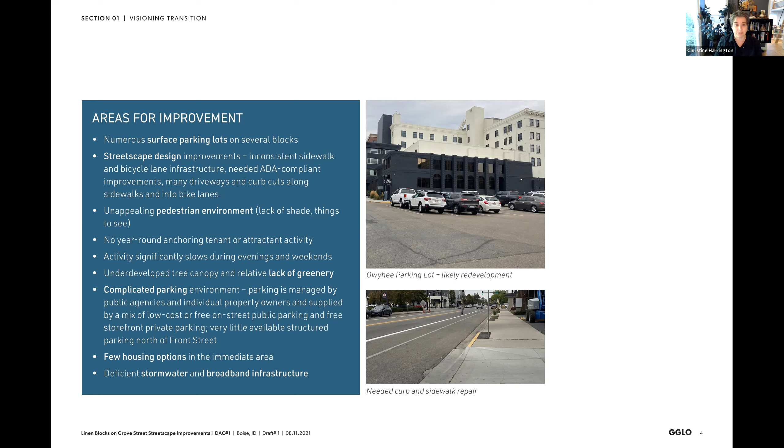As we move forward, we also looked at these themes that were brought up during the visioning, and started to think about how we can translate these themes into the materials and design moving forward. A couple of themes that really struck us were light industry, the housing, transportation corridor, and immigrant working class, all kind of merging together.

With light industry, we started thinking about materials - potentially using metal, brick, dimensional stone, concrete within portions of the neighborhood. Looking at pedestrian scale and gathering, how do we bring this community aspect that was very prominent during the early 20th century through flexible open spaces, welcoming pedestrian realm, impromptu gatherings and daily meetups.

And looking at the history of the transportation corridor, we were excited to think about how we could leverage some of the large-scale signs and landmarks already there and create these roadside attractions that would be sticky elements as people were driving along Front Street and Main Street in Idaho, and you look down 11th or 16th and catch an eye that draws people into the neighborhood.

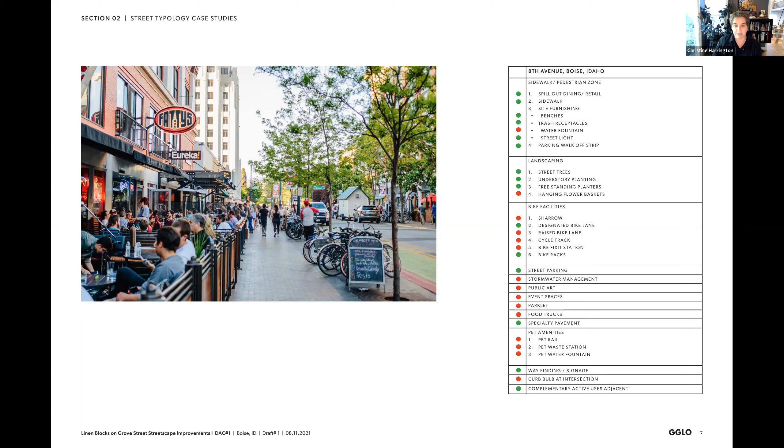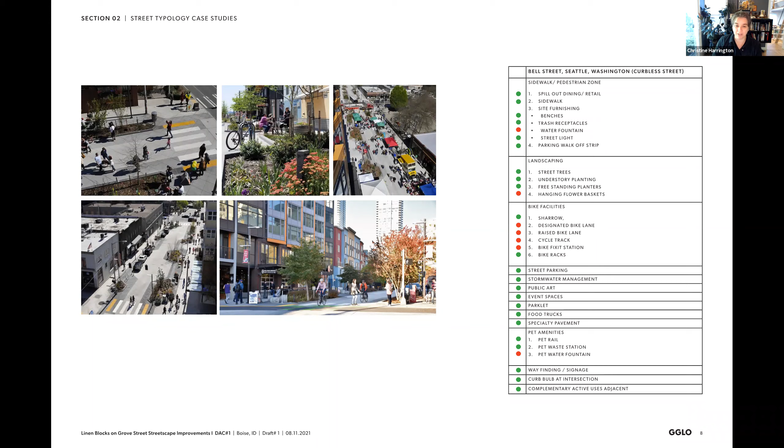As we look at a few other streets as case studies, we have a street in Seattle called Bell Street, which has really become a festival street. They have eliminated all curbs, so it's really a type called a festival or Woonerf street, where people and vehicles kind of merge together. It allows breakout events very easily, as well as daily life with bicycles. It's just a very easy, walkable street. Now, there are some things in this that work well for our street, maybe not the curbless elements all over the place, but there could be some elements that would really help.

Another one in Seattle that we took a look at was 7th Avenue. This is running by the Amazon spheres now, and it's a really bustling hub in the Belltown and downtown area. This raised, separated cycle track really allows people to commute back and forth from North Seattle down into downtown. It also encourages people to pull off and park their bike at these destination retail spaces along the side. It's a very safe and welcoming area for both bikes and pedestrians, and it gives vehicles an understanding of where they can drive and where it is safe for bikes to be.

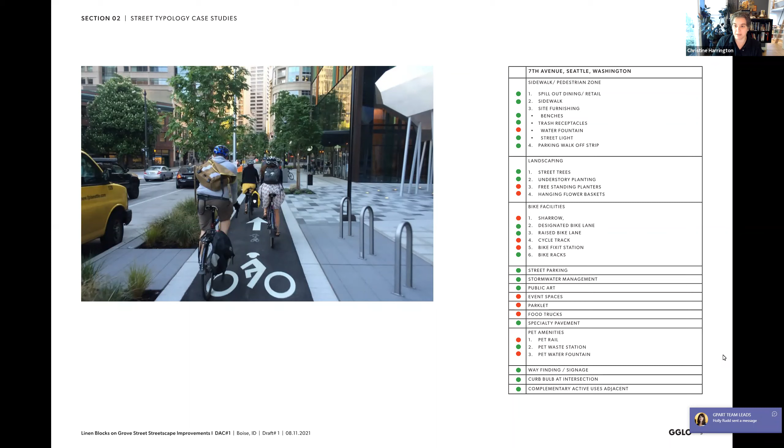Then we also looked at Alberta Street in Portland. This is a really vibrant festival street with a lot of color and historic buildings. They've activated the street with spill-out retail as well as a lot of public art, so people come down here for these Instagrammable moments with murals on the building facades. You can also see here a lot of different layers of planting in pots spilling out of the retail, as well as the street trees and street planting.

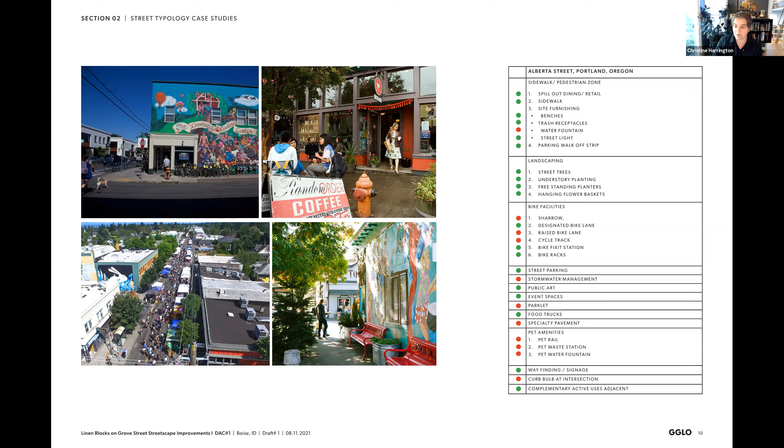We looked at another historic district down in the Pearl District of Portland. This is interesting because they have a much smaller right-of-way space here, much smaller than what we have on Grove Street. So to differentiate the right-of-way and the public realm, the sidewalk and pedestrian realm, they started doing some elevated sidewalk areas to really separate and give pedestrians a sense of safety and security.

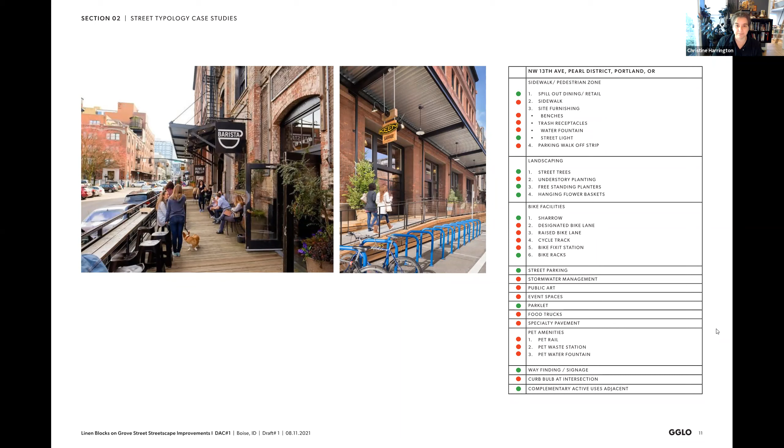Then we looked at 24th Street in San Francisco. This is very similar to Grove Street. It's a local business district with restaurants, retail establishments, residential, and a very lively street. As many of you probably know of San Francisco, their streetscapes are pretty barren, usually just trees in tree grates. But here on 24th Street, they really started to amp up the planting, which was a commitment by the retail and property owners adjacent to it.

So you can see here one of the things they incorporated are these pet rails to keep pets from going into and using the planting, so it really retains the lushness of the planting material. It really gives a sense of these different spaces and outdoor rooms. This is a heavily trafficked street, but you can really sense the scale and the ability to have nice walking and dining experiences, even though it's a really busy street.

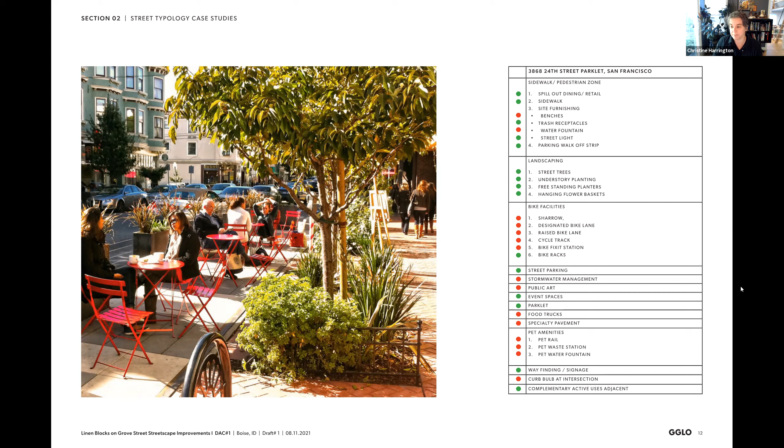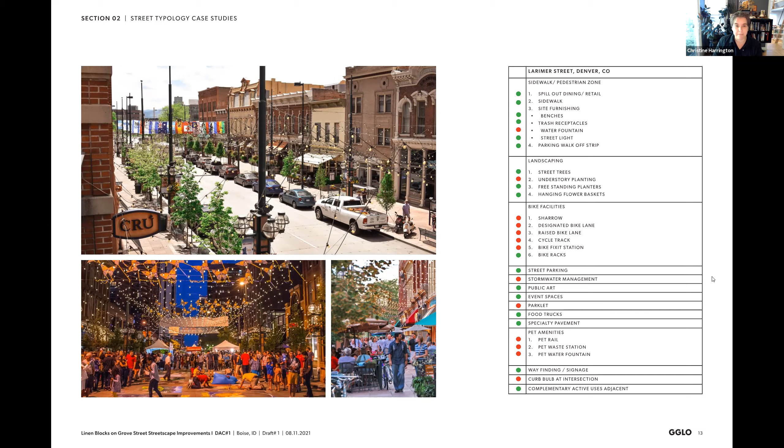So when we looked at all of these together, we start to see the common themes. Retail spill-out dining was a common element. Sidewalk furnishings were common elements. And you can really see what was making these streets livable and truly destination spaces.

So we will be filling out our matrix here for West Grove Street as we continue through design, making sure we are checking off as many of these as possible to ensure we have a nice, livable, and welcoming streetscape for pedestrians, bikes, and vehicles.

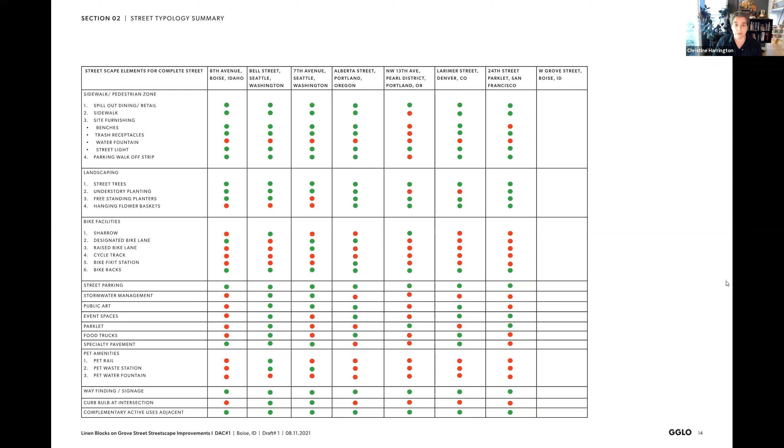It ties in with all of these cross connectors, especially the new bike lane on 11th that they're going to be building in the next year that runs from the Boise River Greenbelt all the way up to the foothills. So we are also really blessed with having all these surrounding parks.

Like Mark said, we just finished and opened the dedication to Cherie Buckner Webb Park. So we have these two parks on either side that really we can draw people from those elements. And as we were talking to Tree Fort and other events that could happen in this area, it really gives us this central core that we could host events here on Grove Street.

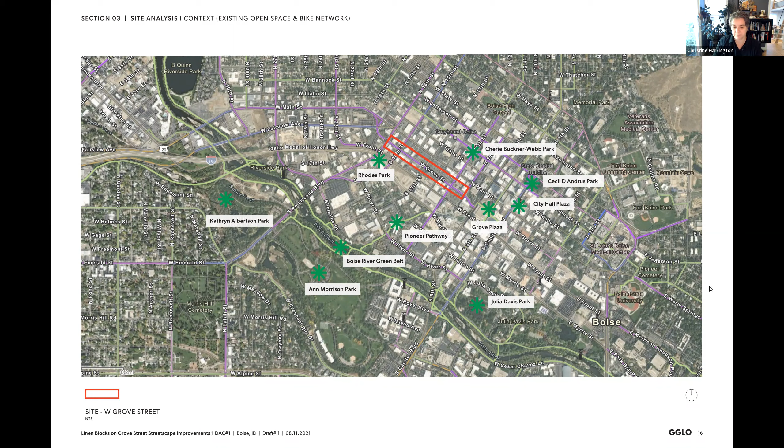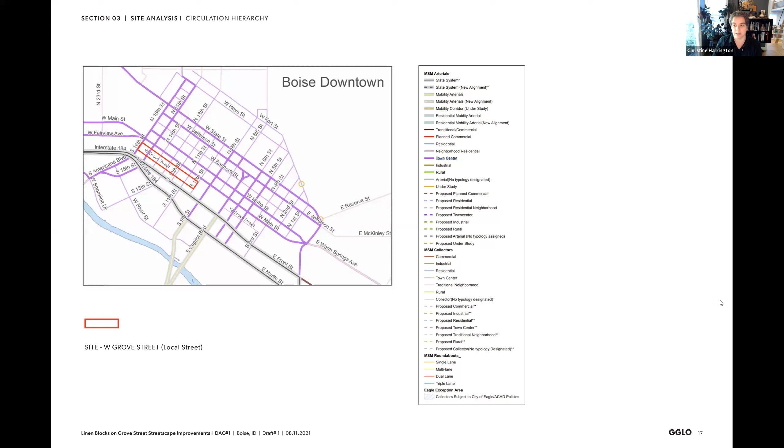So when we looked at the circulation and the street types within downtown, Grove Street is identified as a local street. All of these larger purple streets are main collector streets, and then these smaller purple streets are residential collector streets. So ours is really meant to be a local town center streetscape scale and feel. We'll go over that a little bit more later when we show you the ACHD's design guidelines for those.

So if we kind of dive a little bit more in there, as you guys are well aware, we have a lot of traffic on Main Street, a lot of traffic on Front Street. But if you look at kind of the scale of Main, Idaho, and Grove, they all have that same really wide, 80-foot wide streetscape, including the sidewalks.

So how do we differentiate the bustle of Front Street and the main thoroughfare of Main Street? How do we differentiate Grove Street from that? And how do we slow the traffic down as it was intended to be, to allow people to look over at the retail establishments and bring them over to get them to stop, park, and use the retail?

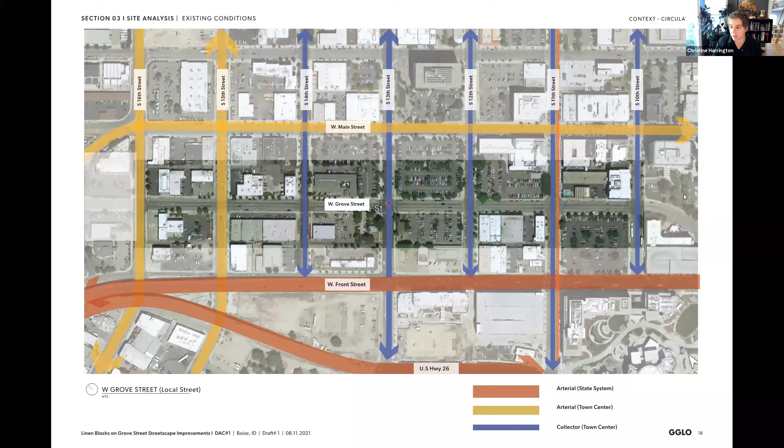Right now, parking is really a premium, and mostly it's because a lot of people park down here and then go and work downtown. So we want to make sure that those parking spots are actually used for the retail establishments as well, and really to allow people to stop and visit our Linen District.

So if we zoom in a little bit more and start to look at what the use of all the properties adjacent to Grove Street are, you can see a lot of parking lots. As this was the auto row back in the 50s, 60s, 70s, these parking lots really served a purpose. They're not quite serving the same purpose now, or what we would like to see for the Linen District.

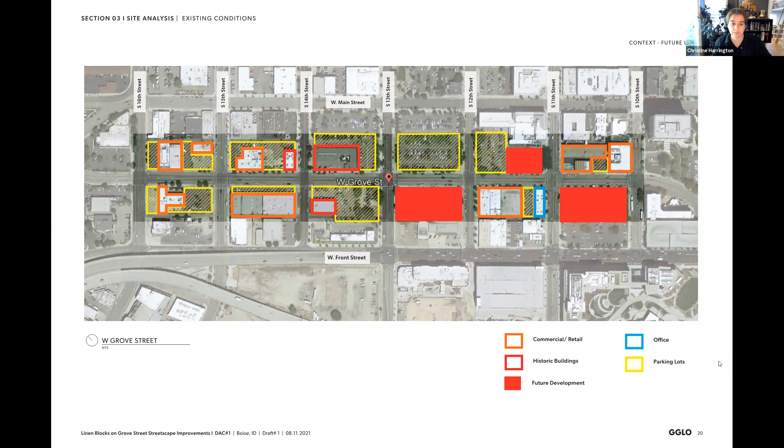So as we dive in, we're going to be looking block to block as to what we identified when we were on the street. And then also we'll look at a cross section of what that looks like, and the opportunities that we see just at first glance. We'll start looking more deeply as we start to do design, but just wanted to give you guys this first glimpse of our findings.

So you can see that there's a lot going on along the street. One of the things that was kind of historic of the street are all of these curb cuts. That made a lot of sense when this was auto row, to get in and out of the parking lots. People really used Grove Street as a main thoroughfare.

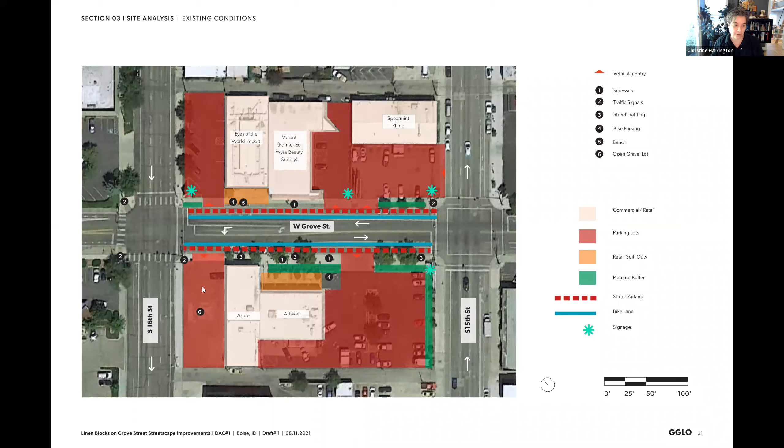And actually, you'll see there are a lot of these - if that kind of corner was a gateway, how do we start to enhance that? Because right now we just have these two parking lots at the corner.

So if we look at just the scale of this, it's pretty much an 80-foot wide right-of-way, which encompasses typically 11 to 12-foot wide travel lanes. This one happens to also have a turning lane onto 16th. A 5-foot bike lane, which is standard for ACHD's bike lane dimensions, an 8-foot parking lane, and then we have usually 10 to 12 feet of pedestrian realm, which can be planting or furnishing zones, sidewalks, spill-out retail.

Where we cut it right here in front of Eyes of the World, you can also see the opportunity for spill-out retail as the building is set back. So we'll be looking at throughout design, what are the elements that we can plug into each one of these zones. We'll be calling them a kit of parts. So we'll look at each one of these zones and how can we enhance each one to make it function better in the Linen District.

So as you can see here, the intersection of 16th is ripe with opportunity for some sort of gateway element. And also, if you are standing in the crosswalk looking down, the thing that struck us most was just the scale of Grove Street. 80 feet isn't actually that large, but because of the lack of layering of amenities, it just feels expansive and really overwhelming to the pedestrian.

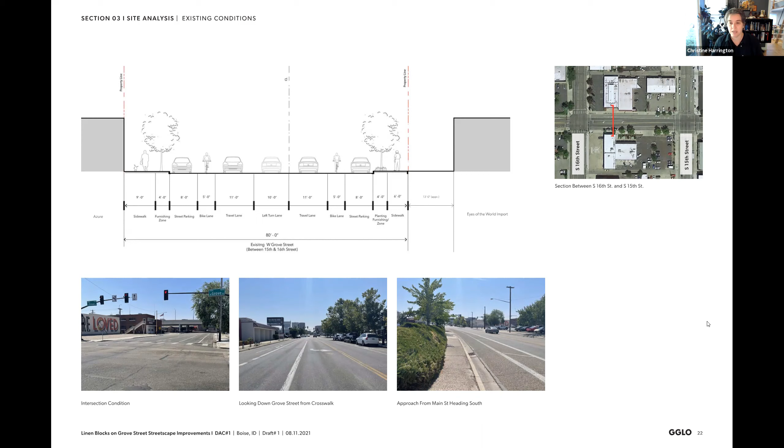So what we want to do is really designate and differentiate the pedestrian realm from the vehicular traffic realm. And then you can see it also as you approach that intersection from the north, you really can't tell you're entering the Linen District. So we really want to make sure that we highlight that with some sort of gateway feature.

Want to enhance these pedestrian crossings, making it safer and more visual for vehicles and safer for pedestrians. Other elements that we identified were street trees, potentially narrowing some of these driveway entrances. We spoke to the owner of Eyes of the World property, and we talked about how can we utilize the front access, maybe one-way directional access, so we can narrow that driveway and then exit out on the alley. We're really fortunate to have alleys on both sides of Grove Street that we could utilize.

And then another thing that is really unique to Grove Street are all these iconic signs and billboard signs that run along there, which again are remnants of this auto row and vehicle-centric area.

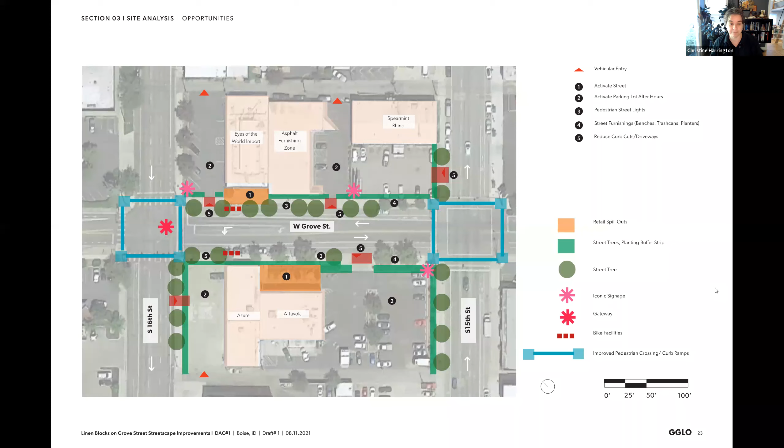So if we go to the next block, we shift down to 15th Street, we start to see kind of the same thing. We have a lot of parking that is butting up against the sidewalk. This block is actually unique in that we have a parking lot with a drive aisle, with a sidewalk, with parking, and then another drive aisle. So you can see a lot of this really valuable developable space is taken up by cars.

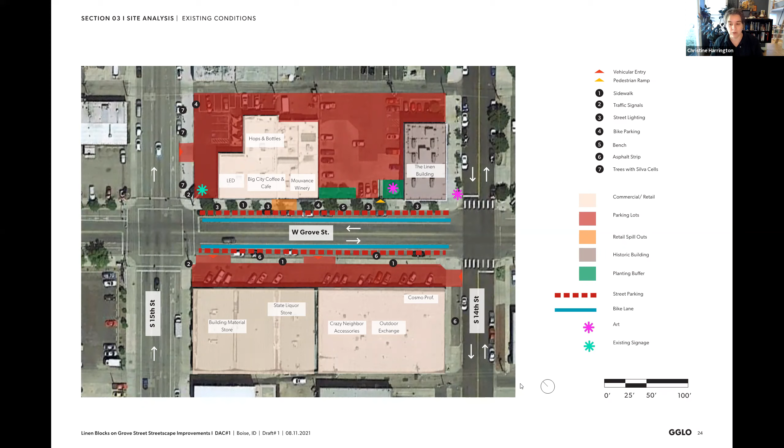And so we looked at how can we start to change that a little bit and start to break down this 30 feet of parking and travel aisle here - drive aisle, they're on private property. How can we start to look at that differently and incorporate some of that for open space and amenity space for those retail establishments to draw people in, and potentially shift that parking to better consolidate the drive aisles.

We also saw that there are these really beautiful little nooks and crannies along Grove Street, where in this case it's a piece of mural art with the Linen District. And some of these have been kind of fenced off and inaccessible. So we're seeing how we could potentially carve out some of those spaces and work with property owners to create those amenity spill-out spaces along Grove.

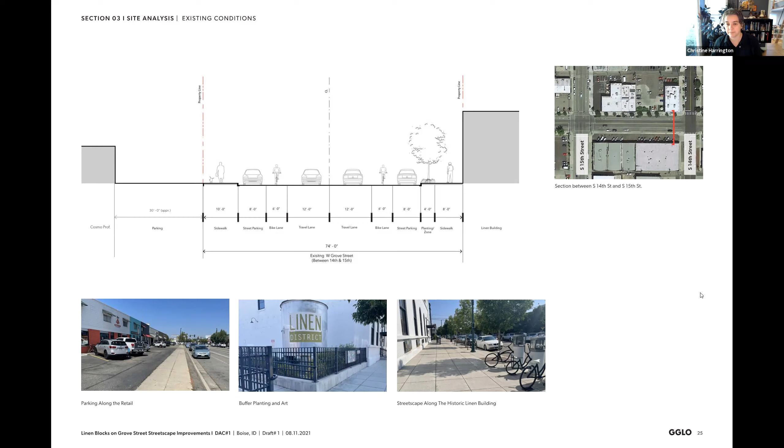So as we start to look at that, how do we bring in amenity outdoor spill out space, like they're doing at Big City Coffee along the western side of Grove. Potentially some ideas are having these spill out amenity spaces with a planting buffer, the sidewalk, and then shifting that diagonal parking or additional parking out onto the street, so it could be used by the travel lane already. We can take up some of that travel lane that is being used on the property.

Potentially, if the retail establishments and property owners agree, we will work with them to give them some design ideas for the future. Another thing is carrying on that tradition of these large signs that we see at the corner of 15th and Grove at the LED. So potentially having additional signage, either historic signs that were identified in the visioning package, and or new signage if retail establishments want to participate in that.

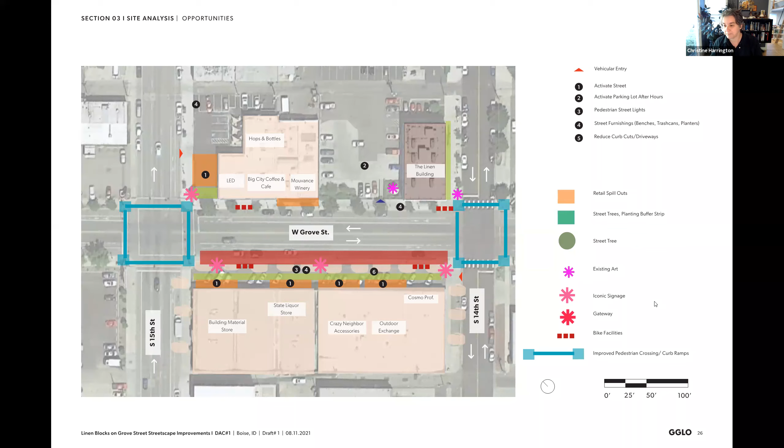So the next block we looked at is between 14th and 13th. This is at the Modern Hotel and Oakley Moody. Oakley Moody, the beloved and long-term retail and service business, is really a unique property because the parking is actually not just parking, it's kind of service oriented. So how do we celebrate that history of the automobile and the auto row? How do we celebrate vehicles and parking and the service industry in this one location? It will be really interesting.

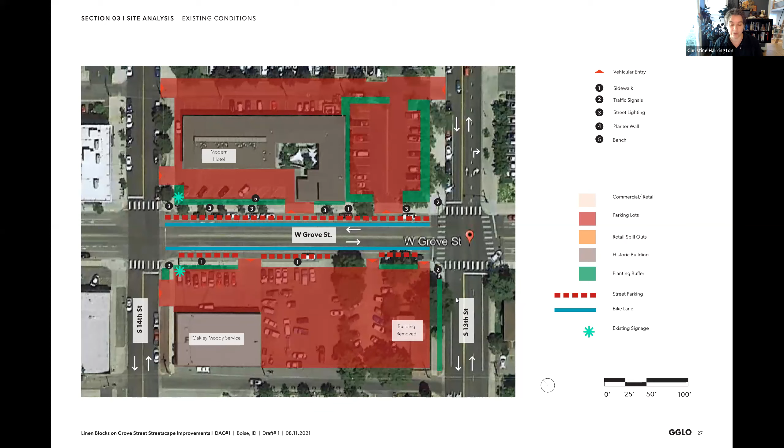And how do we start to work with the bike lane that runs through here, and how do we make it safe for bikers and cars to go in and out of these parking lots? As you see, we have one parking lot and two other parking lots that are kind of all joined together. So we were looking at, again, that's 48 feet of opportunity. We see it, especially down here at the corner of 13th and Grove, where that parking lot is used during the day and oftentimes not as much in the evening hours after people go home from downtown.

So trying to figure out how do we utilize some of these temporary parking elements for event spaces and activate them after hours to bring people from the neighborhood down to this area.

What's going well, actually, let me back up one. I guess I want to see if I can back up one. There we go.

What we found was really successful in this block is the planting and buffer planting that the Modern Hotel had that separated the sidewalk from their parking lot. You can see here in this image down on the lower right-hand side. It really gave this area a separation where the pedestrians are feeling comfortable because they have a lane of parking that buffers from the traffic, street trees that give them shade, and then this other planting buffer that is mitigating the parking on the other side. So you're starting to really feel like this is a pedestrian realm and a safe space.

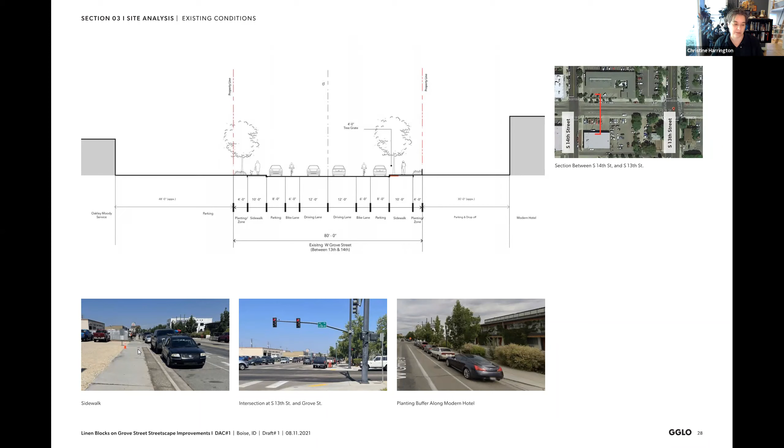The next block is between 13th and 12th Street. This is the block with Idaho Power. Their parking lot we know is going to remain for the foreseeable future. However, the parking lot to the west is slated for redevelopment, and so the current condition that you see here will change.

Some things that we really found interesting and unique about this block is that even though there is this large parking lot adjacent on the east side, they have a pretty deep planting bed that runs between the parking and the sidewalk. It really gave this passive, quiet feel to the sidewalk. It was really amazing just your perception as you walk through that with having just some plants on the street. It made it feel very quiet and safe for the pedestrian, even though there was really no retail establishment. It was almost like a little strip of linear park along this side. So we want to see what we can do in the design to really leverage that and create more of a linear park-like feel along that edge.

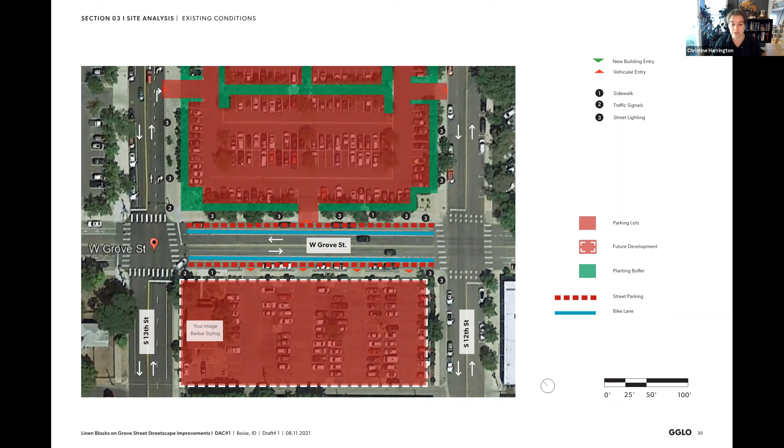You can see here, it was probably almost about 8 feet deep of planting, and a pretty wide sidewalk. They did have some trees on this side as well.

And you can even see it in this lower section—it really felt like you can almost see this kind of historic park-like feel with the mature trees and the layered planting and street lights.

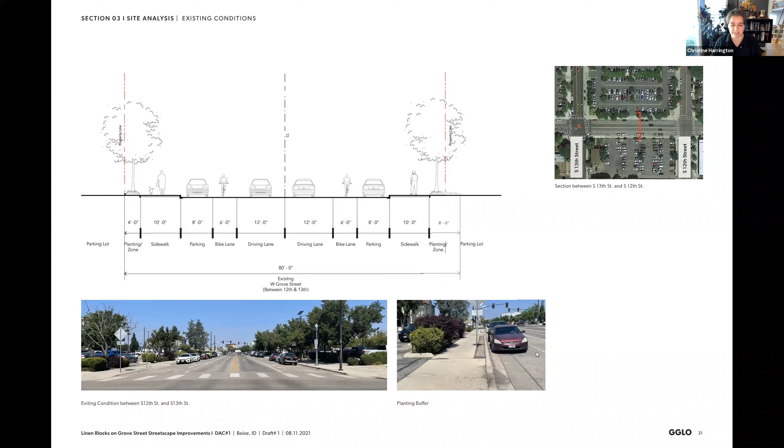Really good bones. So what we were looking at there is how can we activate the actual on-street parking right there. It's not serving any businesses across the street, so are there ways to leverage that on-street parking with potentially parklets or food trucks or elements that would really enhance this area.

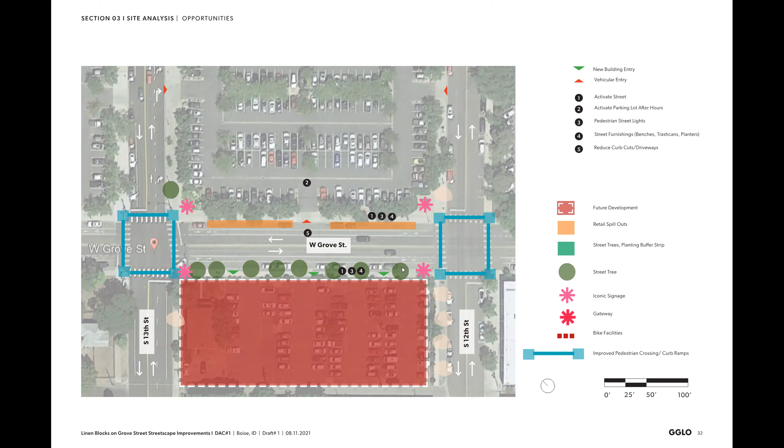And as we look at the new development coming in the future on the south side, we've gotten a couple of glimpses at their floor plans, and what we've gleaned from those are probably retail establishments on the corner with a leasing or lobby in the center.

So it's really going to transform this section of Grove with removing all of the curb cuts on that side, making it a very walkable section and much quieter in feel. And of course, we are always going to be introducing improved sidewalks and intersection crossings.

We also identify this as potentially some areas, since we do have the ability with the new development and also the setback of the parking, to potentially have iconic signage added here, either historic signs or new signage or artwork to continue that vocabulary down the street.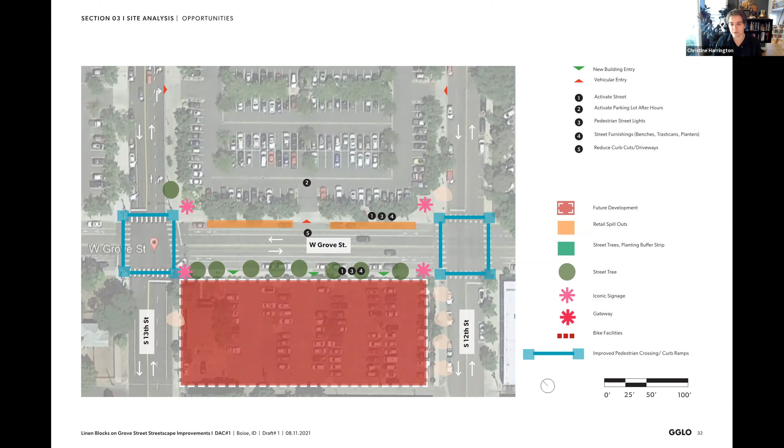So the next block between 12th and 11th, we have a really nice scaled pedestrian walking block on the west side with now the new Presbyterian church space pretty much taking up this whole frontage of Grove on the corner, High Tech Color and Salon 117.

So all these are really kind of community-based and service-based businesses that we would like to develop a streetscape that encourages spill out and activation of the street along that edge.

We also see an opportunity with this small little parking lot and the blank facades along these buildings as potential areas for public art, as seen down in Freak Alley or elsewhere where artists have been able to do murals on the side of buildings.

On the east side is the parking lot for the Owyhee Tavern and Hotel. Coming soon is a little boutique hotel on the corner. So this will really transform this space.

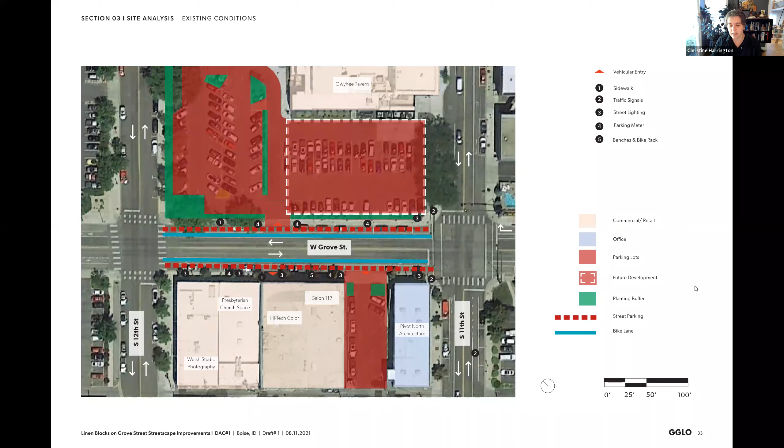And as we look at what that could mean, continuing that planting that buffers parking from the streetscape, and also taking advantage of the opportunities with these blank facades of the buildings.

This section is also in the Downtown Business Association section. Is that correct, Amy? This block? Yes, the bid ends at 13th.

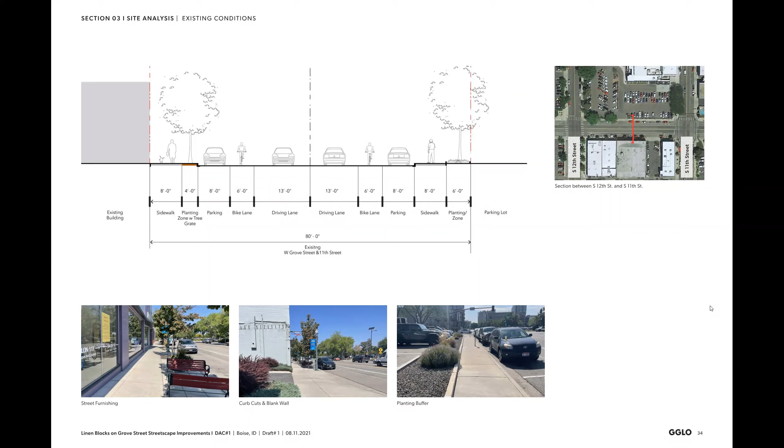So you can start to see where the site furnishing has really helped, and also the care that the businesses along this streetscape have gone above and beyond to ensure the street trees really thrive. By above and beyond, I mean they have arborists come out and actually look at them, fertilize them, and really care for them.

So they saw that as a true amenity, not only to the public, but also to their business.

So as we start to take a look at what that could mean with this new development, how can we leverage that to have a dialogue back and forth across the street, adding a lot more street trees similar in character and stature to the ones on the west side, adding more spill out retail or spaces for the church for community events and activation there.

And again, what are the elements that we could have that are kind of this iconic signage, either freestanding signs or murals on the side of potentially the new building and existing buildings.

We also identified 11th as another gateway street, since it is a heavily trafficked and through street cutting across Grove. So while our site limits for this project end at 10th, we also think 11th is a great kind of gateway feature opportunity there.

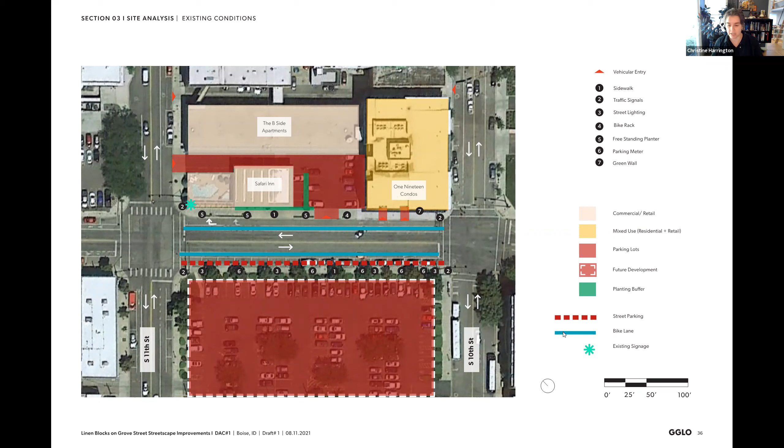So taking a look at what that could mean, we look at the cross section. Again, we have this right turn lane where we're cutting it up here, but as you go further south, this right turn lane of 8 feet, and then the 8 feet of the sidewalk could become a 16-foot width of sidewalk and pedestrian realm, which is really a boon for this area.

And you can see how on 10th, 119 condos has really incorporated a lot of greening. There are opportunities to green not only within the public right-of-way, but also along the building facades. So looking to coordinate with some of the building owners, either existing or new developments, to really soften any sort of blank facades we have along Grove Street.

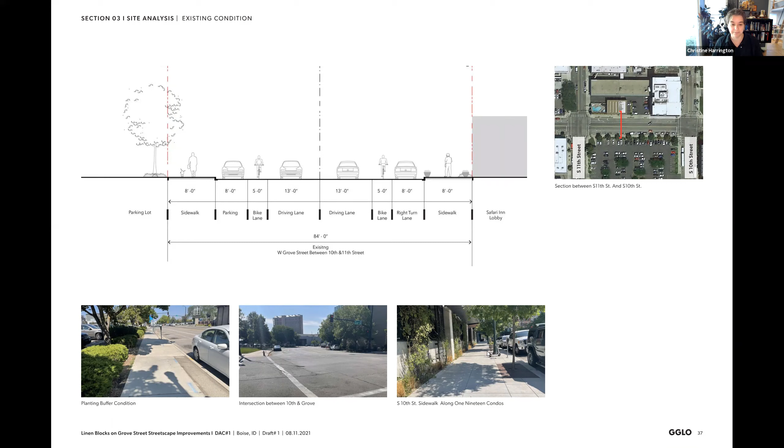And so think about what that could mean. Obviously, adding in street trees. We'll have to keep some of these driveways open, but potentially looking at opportunities for these iconic signages or art pieces and a gateway piece as people are drawn from Grove Plaza down to the Linen District.

And then working with the new property owner and developer on how we activate these areas into either ground floor retail or lobby spaces for the new building. And then providing bike facilities along both sides of the street here.

Hey Christine, this is Jared Smith with Pembridge. You're aware that's a hotel, not— Oh, I'm sorry, a hotel on this side. Thank you. Yep. So Jared, that is true that we'll have either a hotel entry, either mid-block or maybe even on the corner. Correct. And then other retail, probably some sort of restaurant or bar, that would be activating the ground floor. Yeah, thank you. You bet.

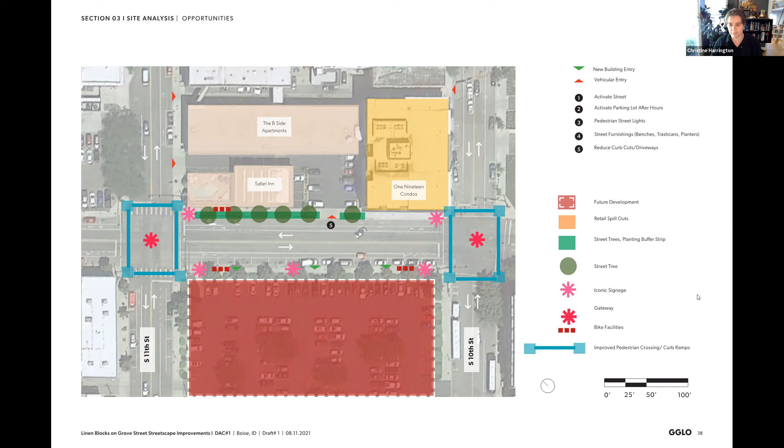We'll keep going then. So looking at next steps, what we are going to be doing now, we're going to be coming back to you in a few weeks once we start looking at the design alternatives for all of these blocks. So as we start to approach design, we're looking at the design principles that were established in the visioning plan.

So how do we integrate historical uses and forms and cultural storytelling elements to create a distinct place? Ensure that the street is designed for a range of mobility options, including walking, biking, transit, and personal vehicle travel. Activating the area through public and private gathering spaces and programming events.

So while the site limits for the improvements from CCDC are only restricted to the right-of-way, as a design team, we're going to be looking at this whole frontage to frontage feel and seeing what are some possible design elements that property owners could pick up and do on their own site.

So for example, in front of Eyes on the World, that really deep spill out space next to them, what could that be? Or the corner space at LED, where they have parking and spill out events that we learned about. So how do we incorporate this private property and have complementary activities going on adjacent to the streetscape to really make it a lively public realm?

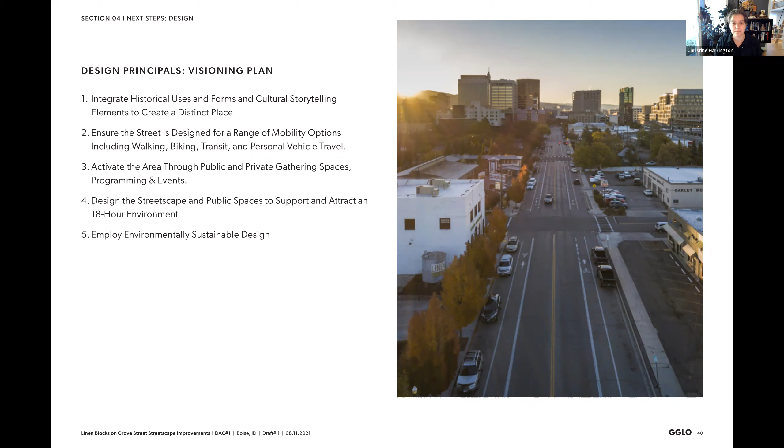So then we're also looking at, that's all the fun visionary elements. We're also working with the old Boise blocks on Grove Street design team down here. We understand that Grove Street is one space, even though it's kind of separated by Grove Plaza, but a lot of pedestrians as well as bikes will be traveling all the way through.

So we want to have a consistency of wayfinding cues, whether that's planting, bike lanes, lights, planting elements, to really connect the two blocks and have them be sister blocks and sister streets that are married by that Grove Plaza. So we're working with them.

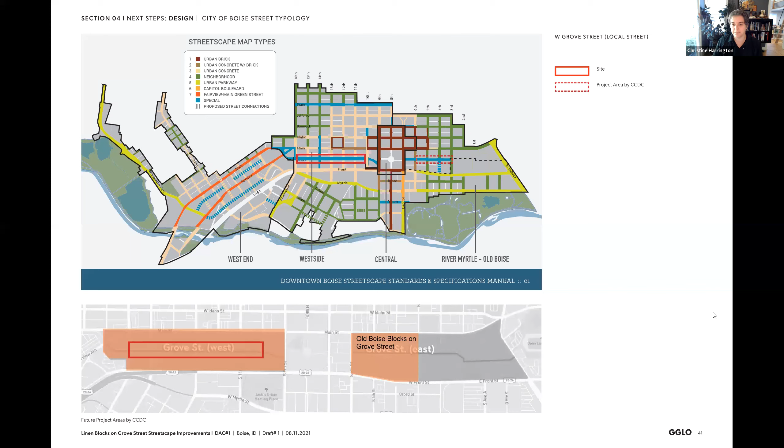And then, of course, we're working with ACHD to make sure that all of the designs we'll be coming up with and presenting to you next time falls within their design guidelines.

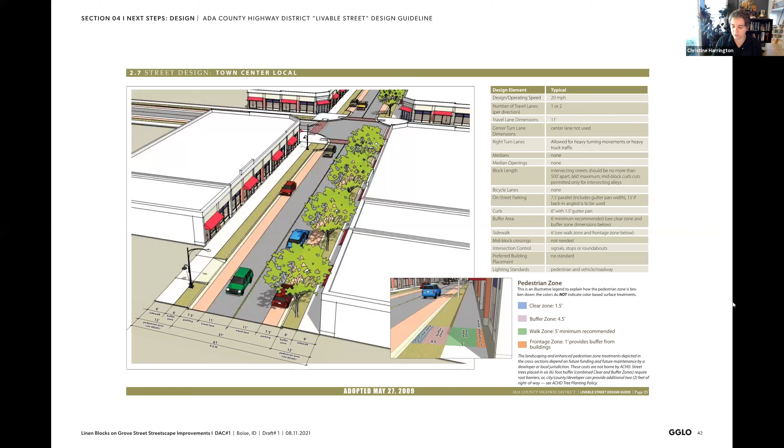So this is just considered a local street. We're kind of a hybrid between this town center local and a town center arterial. While we don't have a turn lane in the middle, we do have bicycle lanes. So we're doing a hybrid of those two, looking at a typically 15-foot pedestrian zone that includes a 9-foot sidewalk, a 6-foot amenity and planting zone, with parking lanes, bicycle lanes, and travel lanes. So we're going to be looking at how to configure this to make it feel unique to Grove Street and to function per the ACHD guidelines.

So any questions about any of these visioning elements?

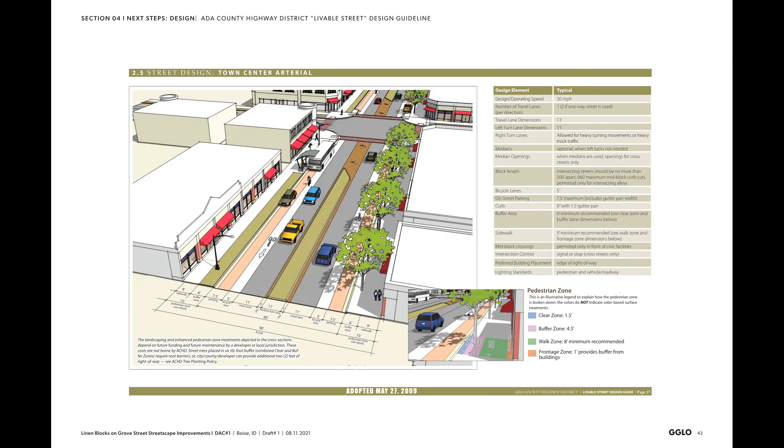Hey Christine, this is Eric again. Just curious if there's access to this slide deck at the end. Yes, we can give this to you. Okay cool, thank you. It's kind of big, so maybe we'll have it as a Dropbox link.

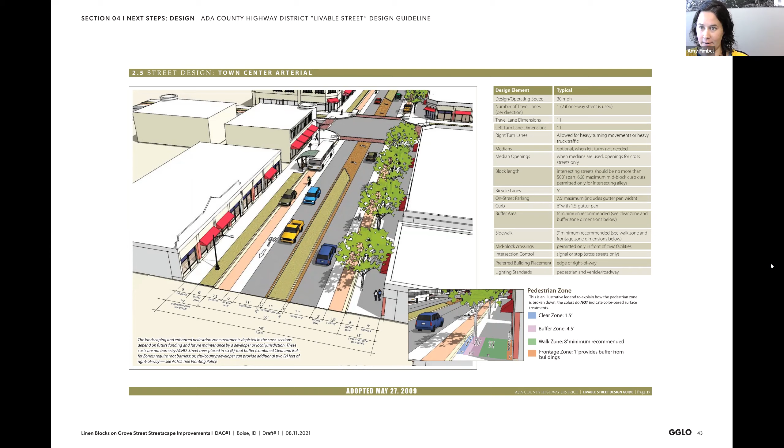So I'll just add to that, we're finalizing the final vision report, so we haven't forgotten about it, and we'll get that transmitted over to you guys, anticipating it will get its final reviews done next week and be ready to share with the group. We were able to get a sneak peek at the draft. You'll see it's, I don't even know how many pages, Amy? It's only like 20. Really? Lots of great graphics. 21. So there's a lot of really great information distilled in that.

So this concludes our site analysis, constraints and opportunities phase. This is where we dive in and start really having some fun with this. In the next few weeks, up until the next time we come in front of you guys on September 8th, we'll be creating some design alternatives, like I said, kit of parts. So how do we start to plug in these different elements into the streetscape along Grove Street?

We also, like Mark mentioned earlier, are doing a pretty thorough cost analysis. We've learned that whatever we show you better be within budget. We don't want you to get excited about something we can't afford. It also gives us a chance to make priority decisions, so we'll have that for you guys to take a look at. If we only have a certain pot of money, where do you as stakeholders feel that pot of money is best used.

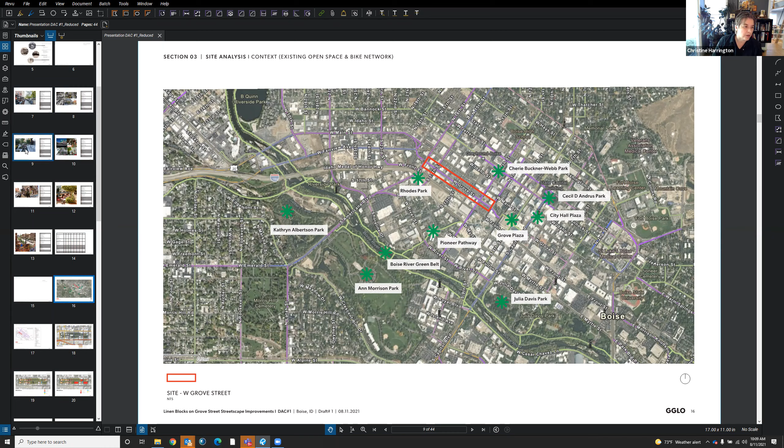Let Christine answer that. Yeah, we're looking at lots of different types of bike lane configurations. I know right now you have a designated bike lane, and so what we had kind of gone over earlier, we are looking at elements -- I think this is kind of what you were talking about, Karen -- this kind of raised bike lane that is separated. So we are looking at this typology, also cycle tracks and designated bike lanes. We'll have these as key points as we move forward, but yeah, we're really looking at how we separate these modes of transportation for safety.

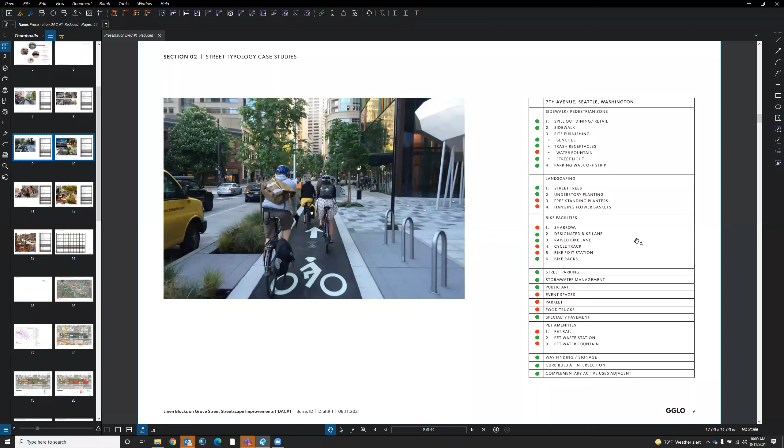Oh great, yeah, and you're recording the meeting, so I'll just go back and watch the rest of that so I can get up to speed. Thank you. Yeah, my pleasure.